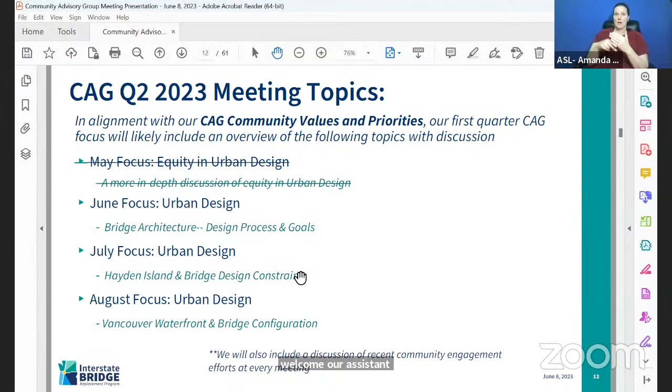Just a reminder, if we can go back to the prior slide, I'll cover that quickly. Just a reminder of upcoming topics again today. We're going to have further discussion relative to design, and the focus of today's conversation is we really want CAG to highlight the process, and how that leads to good design. In July, we'll have more conversation relative to urban design, where we'll focus on Hayden Island as well as bridge design constraints. And then in August, we will talk about Vancouver waterfront and bridge configuration. So with that, I will turn it over to Ray Mabey.

Good afternoon, once again, Ray here. Happy to be here to share with you some program updates. I did want to just note and thank Tom Osborne. He's 8 hours ahead of us, so it's tomorrow for him, I believe. So thanks to him, I really thank him for being available for our meeting today.

The program's been busy and will always be busy, I think. But we've been busy doing a lot of things and engaging with the community in really continuous engagement, but with a purpose now of looking at getting feedback, but also letting them know about the upcoming draft supplemental environmental impact statement that will come out at the end of this year. We want to make sure people are aware of it coming and that they will have the opportunity to comment. Part of that effort has been a couple of neighborhood forums. There was one done in Vancouver at the end of last month, pretty successful, pretty well attended. I think numbers I've heard, don't quote me, we're in the 70 to 90 range.

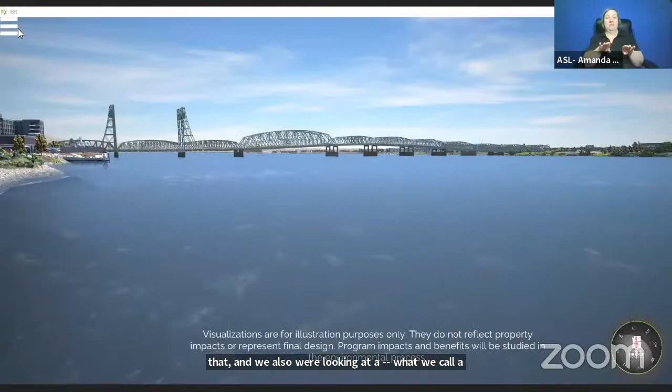We looked at that, and we also were looking at what we call a single level option, where you have both highway and transit and bikes and peds on the same level. The southbound bridge would have bikes, transit and vehicles and southbound traffic, and northbound would have bikes and peds and northbound highway traffic.

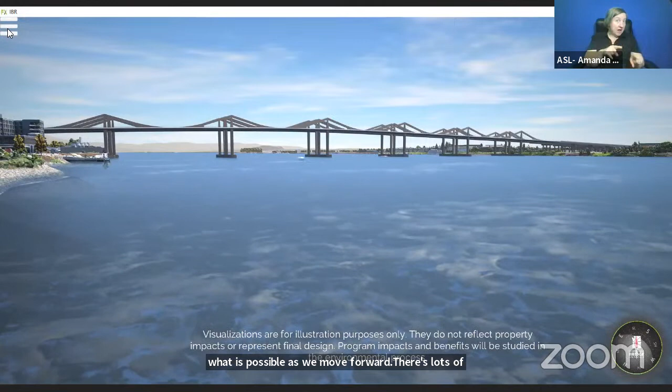These allow for some different options of superstructure type, and we developed these to help share what is possible as we move forward. There's lots of work to go through and validate and confirm that these are indeed feasible and would work, but we wanted to make sure we got some thoughts out there on how we might work through this.

Brent's scrolling through these, but I want to talk about these. The viewpoint we have here, can we just stay on existing and then quit moving it? So this is the existing view from the west side of the bridge from the north bank of the river, the downtown Vancouver waterfront.

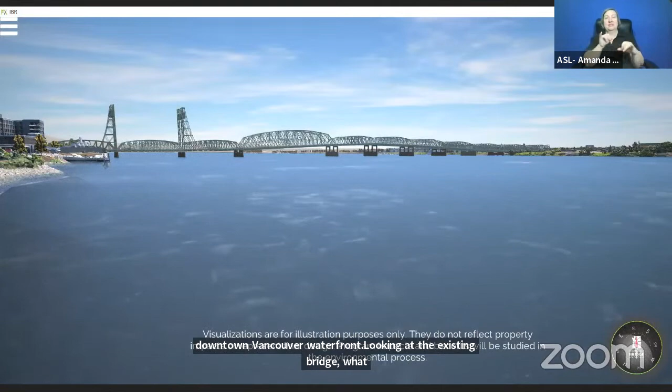Looking at the existing bridge, what we'll do is look at all the options from the same vantage point. Online, we've got 4 different views on our webpage for each of these different configurations, so feel free to take a look at those later. If we can move to the next one in line, please, Brent.

This is a fixed span. We were looking at a movable span, but most of these will be fixed. Using the fixed span or the single fixed span

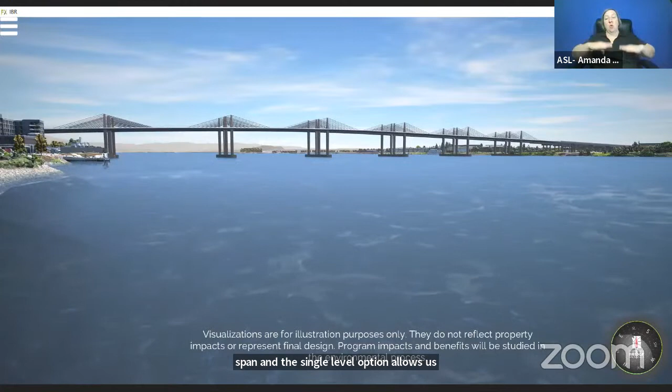and the single level option allows us to lower the deck a bit compared to the upper deck of the stacked option, which allows us to have superstructure that goes above the deck and not impede the airspace needed from the FAA for either Portland International or Pearson Airfield. So it allows us to have a different superstructure that some may view as more aesthetic, but it adds more structural elements.

In this case, this is extradosed, so it's kind of like a cable stayed bridge, like the rail bridge in downtown Portland, the transit bridge there, but it's combined with a pretty robust superstructure. So the towers aren't as high as you might see on a cable stayed structure.

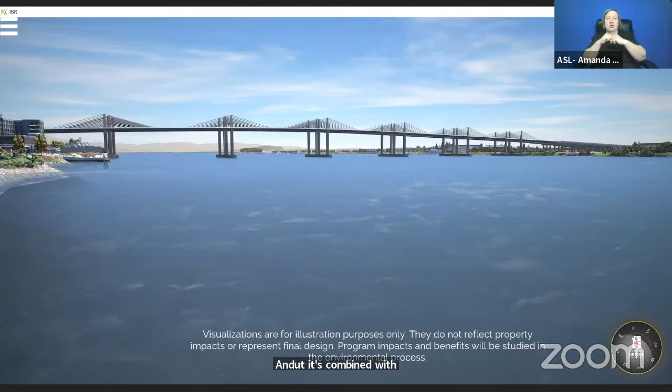Let's go to the next one. One thing to think about too is we've kept the pier locations in the same spot. This is critical to minimize in-water impacts and be able to handle the river navigation channels, either during construction or in the final configuration.

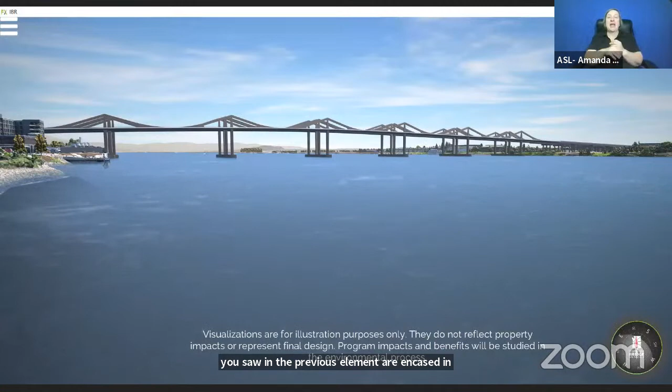In this case, we're looking at a fin-back bridge. The structure is somewhat similar, but the cables you saw in the previous element are encased in these superstructure elements you see coming down from the peak, just adding a different type of feel and texture to this option. Let's look at the next one.

Okay, so this is a haunched concrete beam. This would be very similar to what the I-205 bridge is, the Glenn Jackson, a post-tension concrete superstructure that has kind of a curved beam look to it with a deeper section at the piers. That's a fairly common superstructure type. Next one, please.

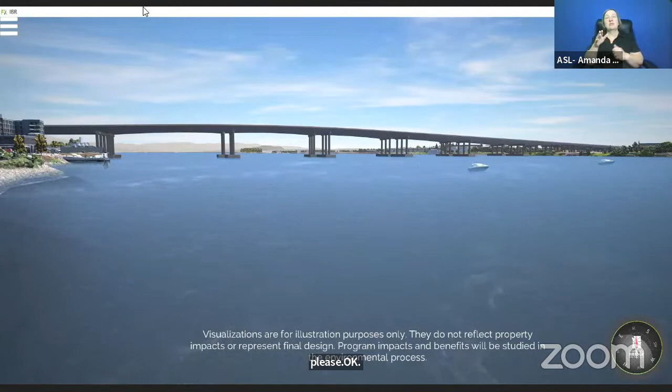Okay, and this is steel girder, similar, not as deeply haunched at the piers, but kind of a similar look. You'll see as we switch between these that the piers look a little different. Now, these are really just to show this kind of relative size.

When we have a steel superstructure for the main portions of the bridge, it's lighter than concrete. So this is to imply that we'd have a little less robust foundation and column areas because of that issue, since the superstructure is lighter. But the design of the foundation and piers is still in front of us. This is just to show a relative comparative size, but pretty similar distance to the concrete we just saw, just lighter in design.

Next option, please. Okay, so this is the stacked version, which is what was developed on CRC. This is much like the Marquam Bridge in Portland that carries I-5 over the Willamette, where you've got a steel truss and a lower deck that carries traffic and an upper deck that carries traffic.

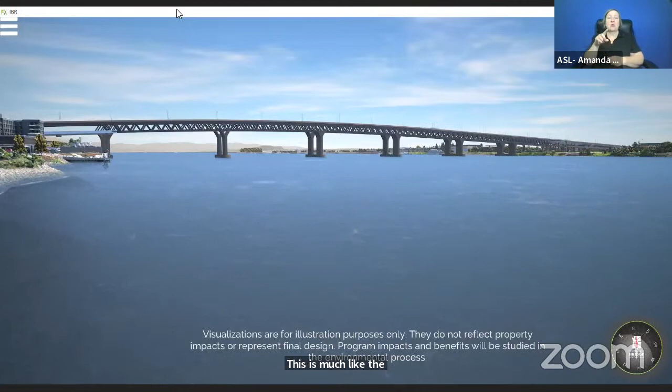But in this case, on the southbound, that lower deck would have the light rail vehicles, and then the northbound would have pedestrians.

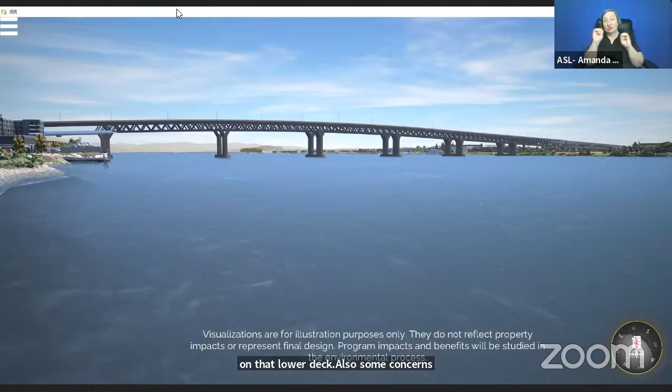The options that I mentioned, single level and then stacked, address different issues. We've heard that there's some concern about pedestrians and bikes being outside the view of the traveling public on that lower deck, also some concerns of transit and emergency response on the separate deck. So moving things to a single level somewhat resolves those issues, allowing for visibility as well as easier access for emergency vehicles.

So each of these has pluses and minuses that we'll continue to evaluate. Next option, please.

Okay, so we've been working with the Coast Guard and our federal partners on what we need to evaluate. We heard pretty clearly that while the previous program developed a bridge that got a permit at 116 feet, the Coast Guard had heard from river users that they need and are looking for a bridge that provides the existing clearance, or unlimited.

So to respond to their concerns, we've added an option for a movable span in our work. This would show that movable span option that would allow for the current bridge height. This is a lift span, much like we have today, but you'll see those towers are just kind of blocks.

And actually there's been advancement in design and aesthetics around movable bridges. The current structures have towers that are open and you can see all the cabling and counterweights. So new movable bridges are putting a sheathing or cover around that so it's contained, and that helps keep the mechanics and the different pieces out of the weather to minimize maintenance issues.

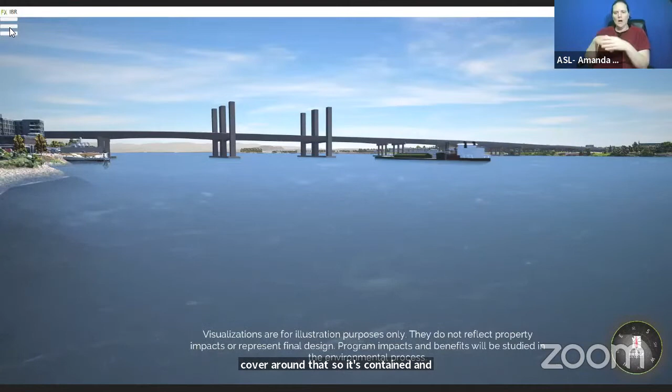The towers that we would see - there's a couple examples that we have from around the world that are much like this, where they just look like a tower and you don't see all the things going on inside them. And the next option, Brent, I think you'll see a viewpoint with that lift span up. There you go. And look, there's a vessel going underneath it now.

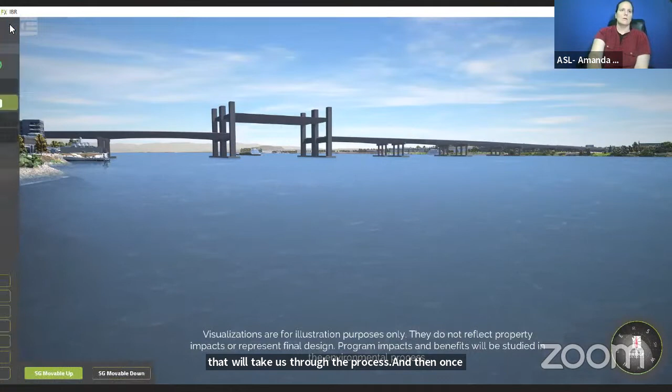So moving forward, really what can we expect and how can we engage in these? Configuration needs to come first. So as we look at the stack versus the single level, that's what we're working through now to understand the benefits and trade-offs around those options, and that'll take us through the EIS process. And then once we land on what that is, then we can start to move to the superstructure type and a process to arrive at what that chosen superstructure type might be.

We just so happen to have Tom and Knight Architects here to kind of guide us through a high-level understanding of what a process might be to do that and the different factors we'll consider. But I'll pause there and see if there's questions. And Brent, you can probably take the visualization down. Thank you for flipping through those for me.

Any questions, comments? Okay, let's see - Zachary, then we'll go to Martha, and then we'll go to Jenna.

Thank you, Ray. Can you talk a little bit about - I mean, we're 2023, so I imagine we can get a sense and a feel for what these different bridge designs would look and feel like from different vantage points. I guess I feel a little handcuffed from just one spot, and then I'm looking online and I think there's four angles, but I'm visualizing like being a sim on the computer game, right? And like walking across the bridge and seeing what that feels like, or being on the beach and seeing what that feels like. When is that going to roll out? I'm assuming that something like that will happen. Can you kind of talk about that?

Yeah, good question, Zach. We actually have both - these first kind of get a first feel. As you know, each of those types of 3D simulations, visualizations, and renderings, we will make sure that we're putting that towards the ones that we are narrowing down to.

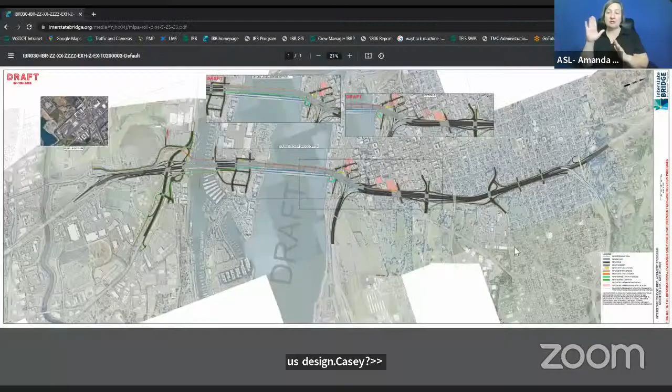Casey? Great, thanks Johnell, and great job Ray. I want to make sure I'm sharing the right screen. I'm going to bring the folks in the group back up to a little bit higher level in the program. Do you see the project area map on the screen? Yes, we are seeing it. Oh, excellent.

Okay, so I want to get the folks on the call and the communities oriented to the recent project area maps that we've shared. We shared this last week at our Vancouver Community Forum and just this week at our Portland Community Forum. So these are new to the program, and they're on our website. We often refer to them as the roll map because it's so long to get 5 miles onto one sheet. This roll map will give you the orientation of the program area, showing you all the investments being studied in the environmental impacts, the supplemental environmental impact statement.

We want to get you familiar with these investments through the entire program corridor. Between now and the publishing of the draft supplemental late this year, and subsequently the 60-day comment period, we want to give you that orientation early, get you familiar with it, allow you to ask questions, get clarifications, and generally be prepared to see those investments studied in the impact statement.

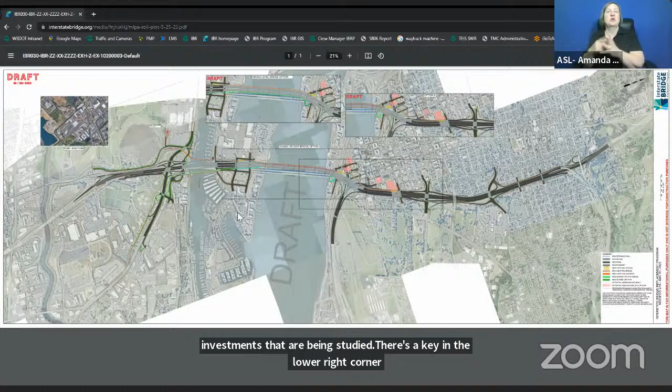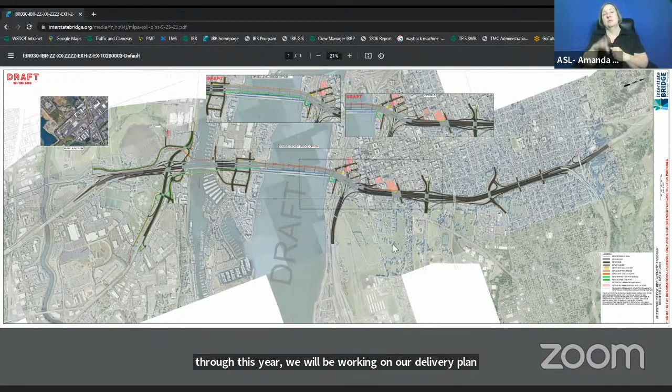Overall, this represents, as Ray mentioned earlier, a very high-level design bringing into the environmental study. We're at less than 10% design, conceptual level design. Through this year, we'll be working on our delivery plan for the program, which will be available to the public early next year.

That delivery plan gives us a sequence of overall design and construction of these 5 miles of investments. That sequence will give folks a picture and timeline to say when we will be working on different elements of the program. A lot of folks ask, like the question here, when will we get to final design? So that delivery plan early next year will help enlighten all of us on the timeline and sequence of all the work. We can't do it all at once, so we need to work on it over multiple years.

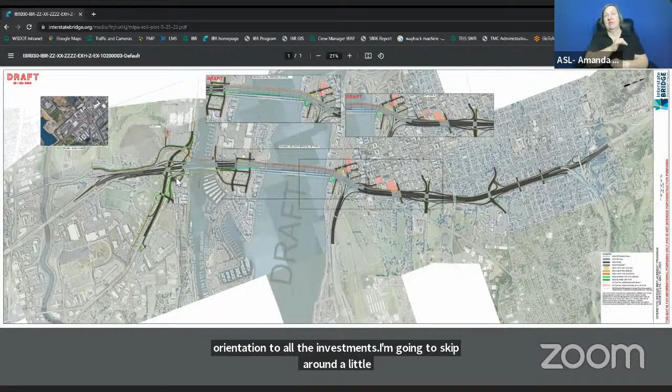So what I'm going to do is walk through the investments pretty quickly. I think I can gain a little bit of time back on your agenda here, Johnell, and walk through the program areas. I want to give more orientation to all the investments, so I'm going to skip around a little bit. I'll start in Oregon at the south end of the program, jump over to Washington, and end near the bridge at both Hayden Island and SR 14, so we can roll right into Knight Architecture's presentation.

Let me just orient real quick. North on this map is to your right, with the river in the middle. That would make west to the top of the screen, east to the bottom, and south to the left.

So we have 7 closely spaced interchanges in the 5 miles. At the south end, we have Victory Boulevard interchange. Just verify if you can see my cursor as I go through—someone yell at me. Yes, excellent. So Marine Drive interchange, moving northward, Hayden Island interchange.

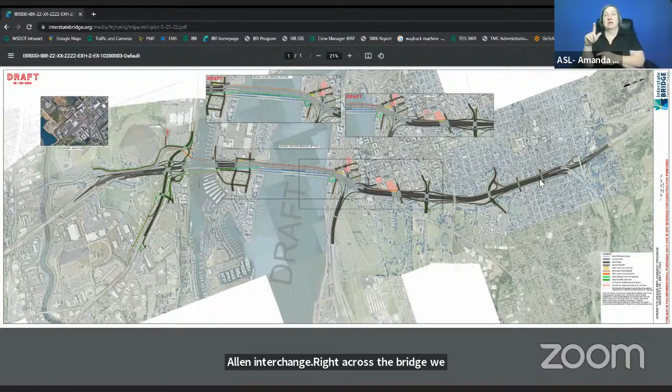On the Washington side, scooting over right across the bridge, we have the State Route 14 interchange, Mill Plain Boulevard interchange, 4th Plain Boulevard interchange, and then we end at State Route 500 and 39th Street interchange. Remember that both the Marine Drive interchange and the Mill Plain Boulevard interchange are primary port access for Portland and Vancouver, and I mentioned the state routes and larger connectivity.

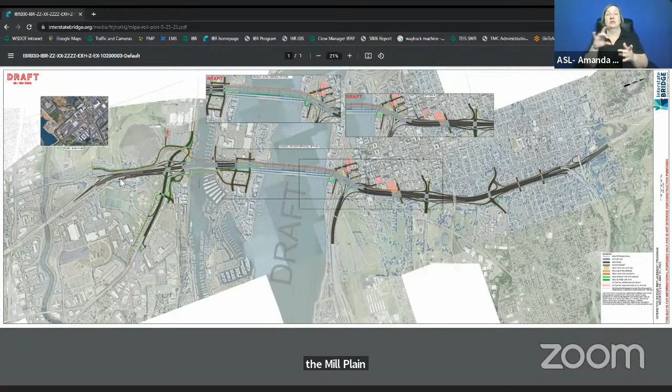So I will try not to make you sick as I zoom in. I'm going to zoom here on the left side of the program and just walk north. The investments reflect all of the investments addressing the purpose and need: the active transportation, the mass transit, the seismic vulnerability with the replacement bridge. As Ray mentioned, all of the elements of the modified locally preferred alternative.

The lime green lines in the program map reflect the shared use path facilities. What's a little harder to see as you look through different areas are the street networks that also have both sidewalks and bicycle facilities adjacent as we develop those street networks.

On the left side of the screen, you see the Marine Drive interchange where light rail transit currently terminates at Expo Station. You can see in the orange line on the west side of the freeway, continuing light rail as the extension heading across Hayden Island, with a station shown between Tomahawk Island Drive and Hayden Island Drive, shown in the yellow boxes.

Active transportation today is not great for wayfinding. In the investments, you can see the connectivity of both the north-south shared use paths, as well as how those connect with east-west existing facilities such as the 40-mile loop trail, as well as other connections within the city of Portland, where we have active transportation connecting to local streets and getting to and from Portland to the south.

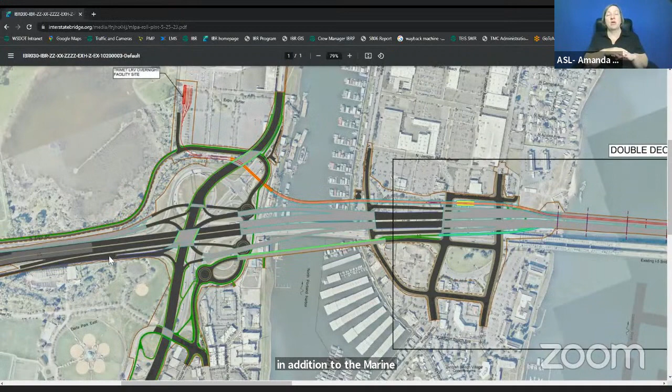The movements for the interchange include all 4 directions for the Marine Drive interchange. In addition to the Marine Drive interchange itself, if you look over here on the left side, if you're coming northbound on I-5 approaching Marine Drive, once you take the exit to Marine Drive, you have an option to stay left and head underneath the interchange up to a local roadway. I'm pointing to that as this circular intersection here.

Then that's your access from I-5 northbound over to Hayden Island. You turn right and then head over to Hayden Island across the arterial bridge shown here. In the reverse direction, to go south from Hayden Island, you go across the arterial bridge, back underneath the freeway to the other intersection, and then enter the same on-ramp as the Marine Drive.

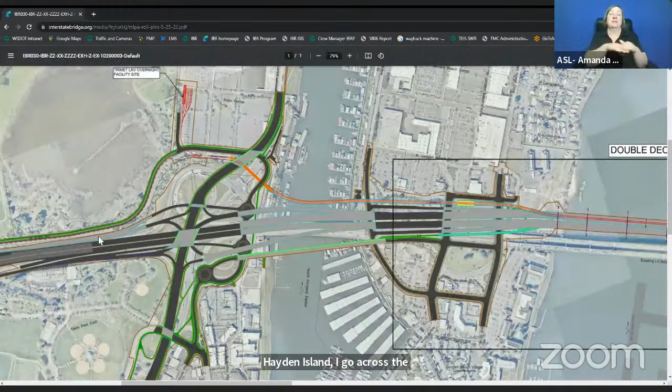To the left side of the Marine Drive interchange, in concert with the Victory Boulevard interchange, we have a braided ramp getting on from Marine Drive to go southbound on I-5. That braids over the top of the existing southbound exit to Victory Boulevard and Denver Avenue. The braided ramp is one tool, just like auxiliary lanes or collector distributor lanes. Those are tools we have to address very closely spaced interchanges.

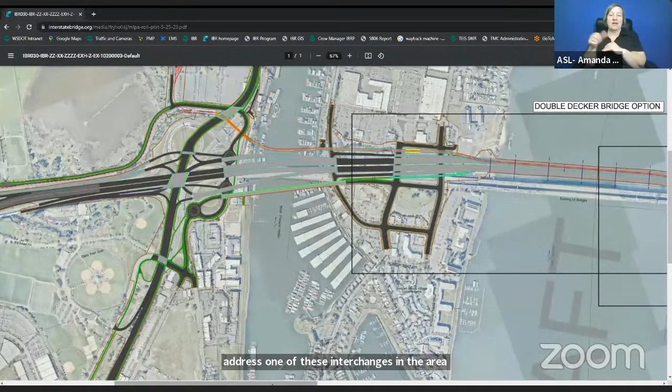Again, when you address one of these interchanges in the program area, you have effects on others. So I'm going to skip around on you just a little bit and head to the north so I can end at the south, or at the bridge head. We're going to go all the way into Washington and then come back. And I have to zoom out.

Skipping over to Washington, the SR 500 Fourth Plain work is being done in that area. I mentioned the braided ramp - this has a braided ramp addition for southbound I-5, braiding with the SR 500 westbound to southbound movement, a very large movement today that WSDOT in the last few years started addressing with ramp meters. That braids that movement. Just as a side note, the resultant of that, if you're headed westbound on 500, you no longer can get off and go straight to the Fourth Plain Boulevard interchange. You'd have to take a different route, such as 39th Street or Mill Plain.

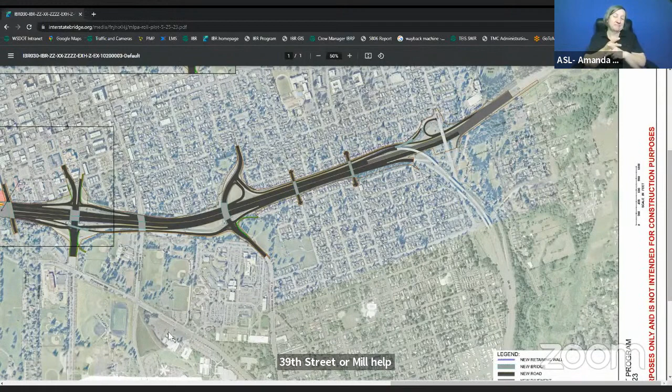The Fourth Plain Boulevard interchange doesn't get much improvement or different form for the interchange itself, but it adjusts based on the needs for the freeway there, as well as the braided ramp connections to the Mill Plain Boulevard interchange.

Moving south just a little bit, this also reflects the replacement of the 29th and 33rd Street overcrossing. Each time we work through the investments in the program, we want to look closely at the east-west connectivity of active transportation, as well as north-south connectivity.

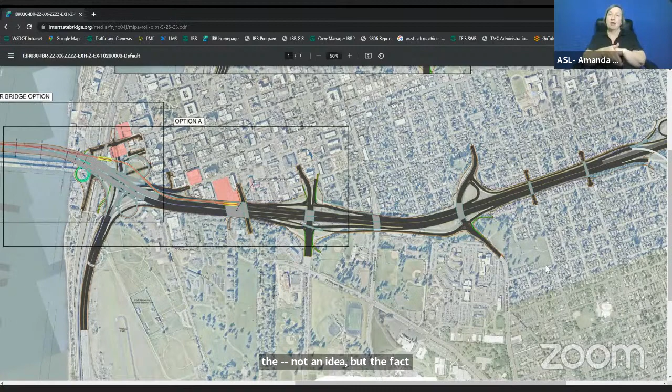So we're showing that though these bridges are replaced, if the facilities there aren't conducive to walking, biking, rolling, we want to make sure those are great facilities for the options getting across the freeway. We want to reverse the fact that the freeway is a barrier to crossing and connecting those neighborhoods. So each one of these, we want to make sure it's the best it can be.

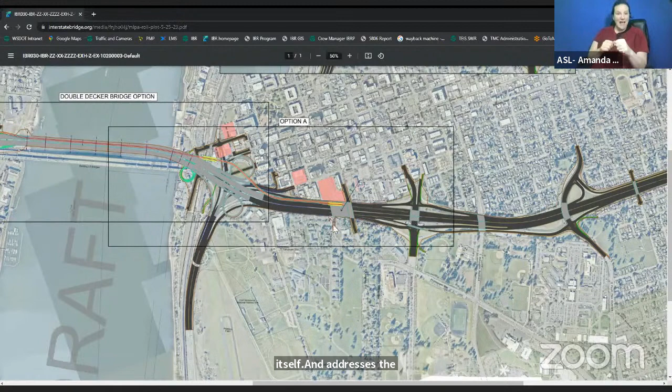Move south back towards the Mill Plain Boulevard interchange. Again, this is more efficient than the interchange today. It addresses the work on the mainline I-5, addresses some clearance issues with the interchange itself, and addresses active transportation through the area as well. To the south of the interchange, there is a collector distributor system between State Route 14 and Mill Plain Boulevard interchange in both directions.

I'm going fairly quickly, but I aim to save a little bit of time back. So I'm going to get close to the bridge here and get ready to answer any other questions, and turn it over to Knight Architecture.

So with the modified LPA, I mentioned light rail transit with 3 new stations. As mentioned, in this option shown here, the double deck option shown under the southbound bridge, coming out to the Vancouver waterfront with a station at the waterfront, shown where my cursor is. Light rail hugging the I-5 alignment and ending at Evergreen Boulevard vicinity here at Library Square.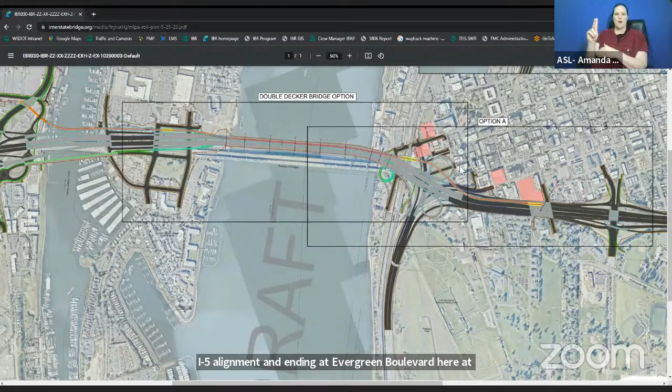The program is studying up to 0 to 3 park and rides in Vancouver, up to 1 at the waterfront and up to 1 at Evergreen, again from 0, 1, or 2. Park and rides are shown in these lighter reddish pink colored squares for options. The third one is a little bit hard to see, but it's about where my cursor is, underneath the new bridges.

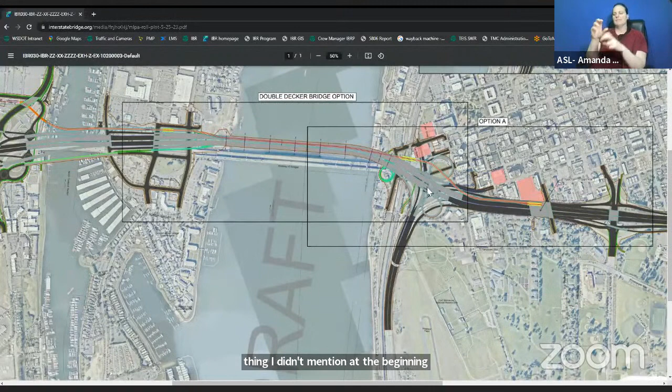The full interchange at State Route 14 is an elevated interchange. The one thing I didn't mention at the beginning that I needed to is this is reflecting permanent investments. Some of the temporary works that are needed to do this work and keep traffic moving are not reflected in these maps.

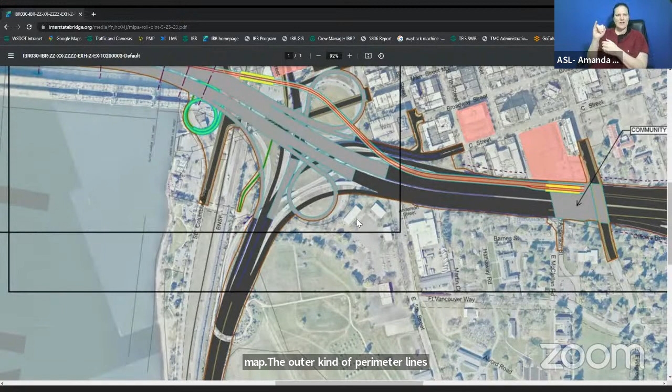And the other part is that in some areas of the map, as you zoom in, you'll see various lines in the map. The outer kind of perimeter lines may not look to follow what the investments look like. Those are what we would designate as the limit of permanent investments in the program area and what's being studied for those permanent investments in NEPA.

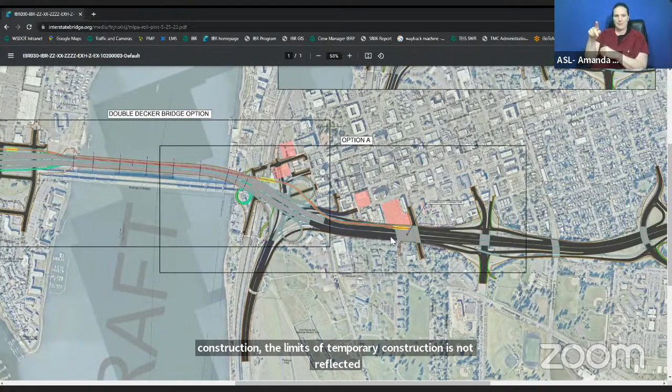There's also a dashed line that represents permanent underground investments, such as tieback of walls. Again, these are high level design, with more work to do to figure out what is needed for those design works. And just to recap, the limits of temporary construction are not reflected in these maps, but it will be published in the draft supplemental environmental impact statement this fall.

And I want to end up with the bridge and Hayden Island a little bit more. I'll start with Hayden Island. I described the 2 ramps for the south side of Hayden, access from the south to Hayden Island. The 2 ramps from the north exit, southbound ends up at Jantzen Drive, and northbound from Jantzen Drive to northbound I-5. The addition of Tomahawk Island Drive underneath the freeway, so you have 3 east-west street connections under the freeway, as well as the bicycle and sidewalk facilities for those.

One thing I didn't mention in Vancouver was the new connection of Main Street under all of the SR 14 facilities down to the Vancouver waterfront.

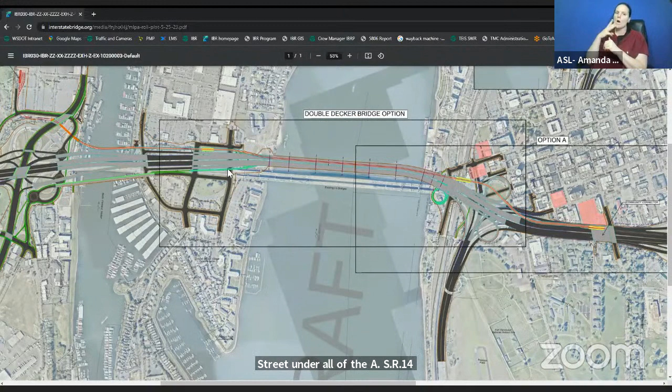The lighter gray in the map represents, for instance, the interstate when it's on a bridge structure. The dark black, almost dark colors represent the roadway when it's sitting on the ground, and it may be ground that's still at a higher level than the surrounding areas. For instance, on the south side of Hayden Island, you see this darker area for I-5 in both directions. It's shown that that's not a bridge structure, but it is elevated above, for instance, the local areas adjacent and off the sides of the improvements as shown there.

I think I've covered most. The one last part I would say is that these roll maps, and we'll zoom back out a little bit, reflect and show that there are options being studied within NEPA.

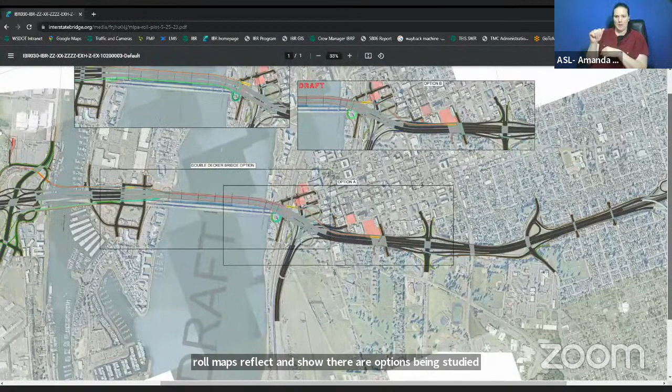The options shown on this roll map include the double deck option, and then you see an inset graphic that shows what the single level bridge option looks like. Most of the differences really occur between each shoreline or just onto the shoreline, and from there the program difference is none from that point.

On the right side, you see option A listed and option B. Those are a shift of the alignment in Vancouver, kind of more easterly alignment on the main graphic, and then the inset is more of a westerly alignment, looking at a range of possibility for that alignment through Vancouver.

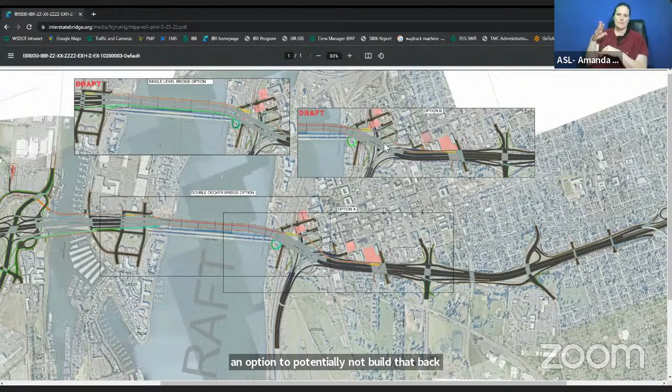Also in option B, you will see other additional options. The northbound off-ramp to C Street, that's the loop ramp on the east side where my finger is pointing, and that's an option to potentially not build that back, as well as the southbound on-ramp from C Street to I-5. So those are independent options shown all within that collective graphic.

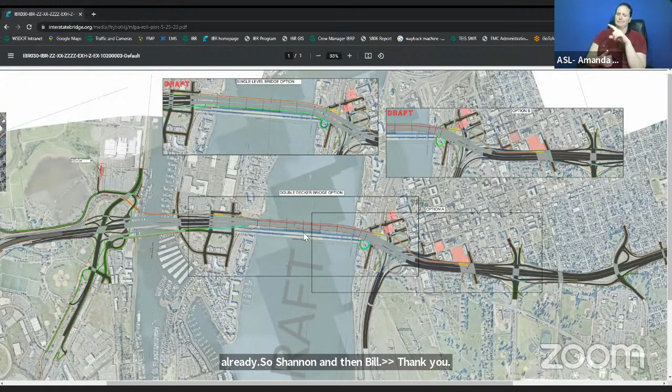Thank you. One of the things that I've been questioning in all of this discussion is if there's been some consideration to all of the oversized loads that move from the ports of Vancouver and Longview across the bridge and into routes in Oregon. I'm just wondering if this will restrict any of that kind of movement.

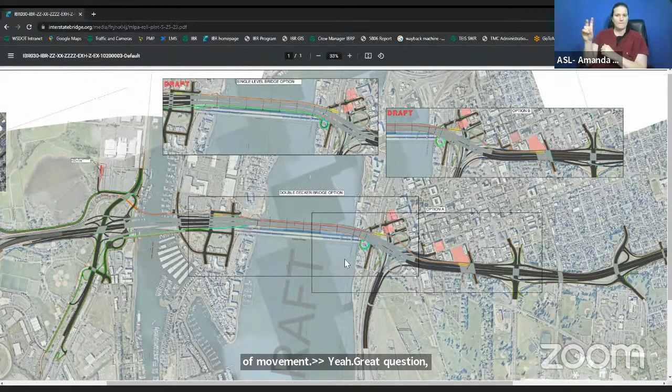Great question, Jana. We've been working with the Port of Vancouver on the existing and any proposed super load type, both height, width, and length. One of the constraints running into this program, or in the CRC, we know was just loads getting to I-5, for instance. So yes, we are looking at all aspects of that, from travel through the corridor, especially from those known elements through the program area.

As we design these, we don't have a hard design requirement, but we are considering how we can make that work without significant change. So far, at this early stage, we will get more into that with final design, but we believe that we can get those loads through based on what we've received from the port and known from up north.

Well, thank you. I appreciate that. I work with a group called the High, Wide, and Heavy Coalition, and it's got the ports as part of it. So if we can offer any assistance there, we're happy to. Thank you.

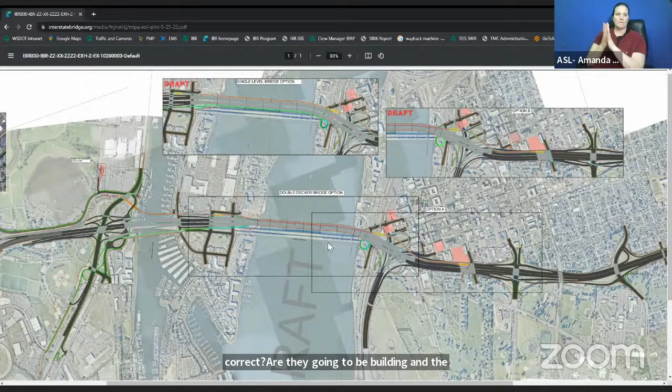Yeah, I think I follow what you're saying, Bill, and I'll start from the bridge out. Let me say it another way: how do we build this and keep traffic going? Because we can't just shut down the freeway, right? Thank you, that's what I was looking for.

Exactly. So the offset of the bridge itself is one of the key parts of that. Of course, we have multiple years of constructing the main river crossing and bridge anticipated. As we're building that, we need to work closely with what will be our design builder to plan to keep traffic moving in both directions. Our goal, our commitment actually, is to keep 3 through lanes of traffic in each direction moving through the program duration.

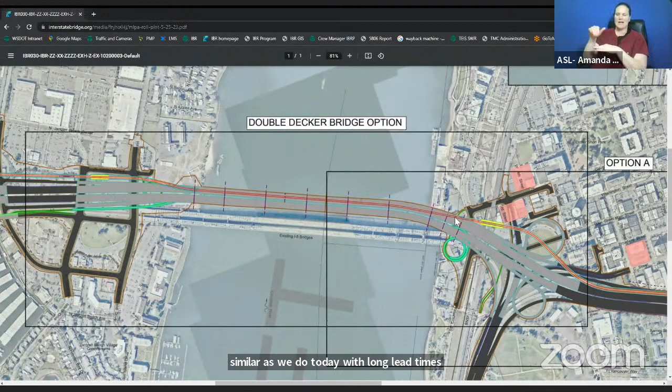There will be times when we impact that traffic. We try to do that similar to how we do today, with long lead times for the public. There may be weekend closure of lanes or nighttime closure of lanes, shoulders. There will be some ramps that might be impacted for longer durations as we try to replace some structures and bridges within the program area. Those will be advertised in advance with known detours. It is a challenge, trying to build a whole new set of infrastructure in the same place as it was.

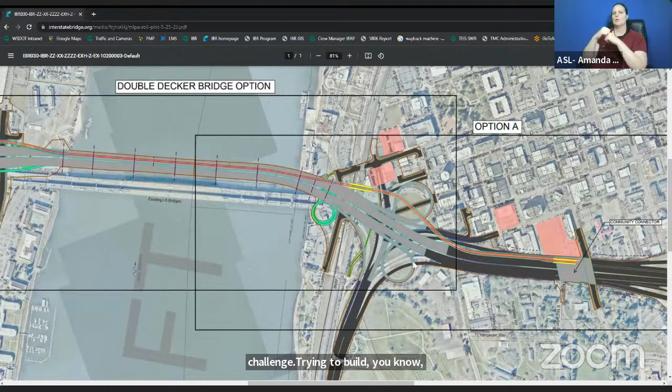As you reach both sides of the land, that's where it really becomes prevalent, trying to shift without adding a whole bunch of different impacts. We've often referred to this as threading the needle, because we have to shift the traffic in different directions, shift them to the west, shift them to the east. Meanwhile, we have some tie-ins to make.

There'll be some minor closures when we work on those tie-ins at both ends of the bridges, and as we sequence the rest of the program. I'd say it's more like you're going to be changing the wings on the airplane in the middle of the flight. Heard that one too. I like that one. I don't like doing it, but actually I like doing it.

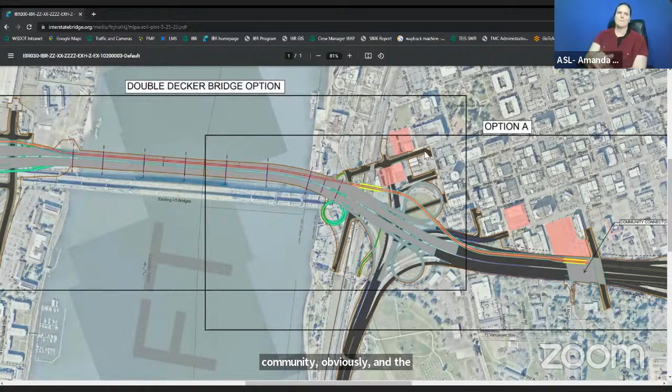It's a good challenge, but it's really important to the communities, the economy and well-being of the communities. So I understand that. Zachary? Thank you. It's really striking, the image, to see it all. I appreciate you laying that out for us.

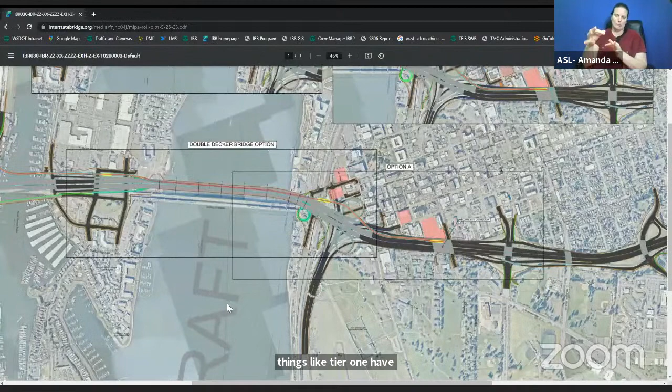One of the things, putting on the lens of a pedestrian advocacy organization, we're often told there's not enough money for that improvement, there's always a resource question. I'm curious, when you look at this project, what are the have-tos? We know we have to have a new bridge, that's a have to. There's certain connections that have to happen. So I'm curious, as you look at this map, are there tier 1 have-tos, tier 2 really-want-tos, tier 3s, things we could stagger so that if we go over budget, we can pull back on some of those pieces, so that we aren't robbing from other projects in Washington and Oregon?

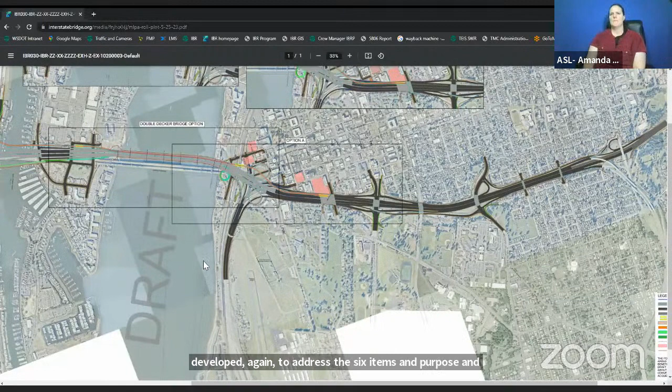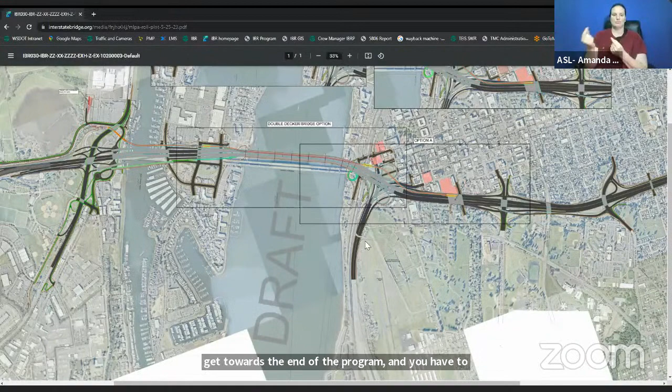Great question. To start, the program is developed to address the 6 items, the purpose and needs. Each of the investments made here is intended to do that, and they work in concert with each other. This is a major multimodal corridor program intended to provide all the benefits through all of the investments made. The difficulty in saying that some of those are lesser in priority is that in the past, you get towards the end of the program and have to cut corners. What are the things you have to cut? In the past, it's been, well, we have to cut some landscaping, we have to cut some active transportation.

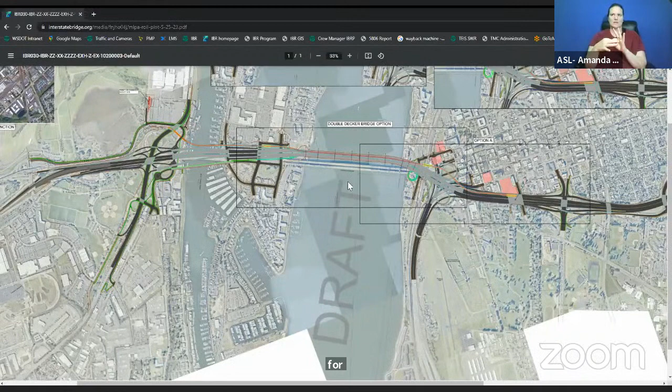That's not our goal. We aim to center climate and equity up front. We want to make sure that active transportation is there to provide options for those users that need those facilities. Same thing with transit connectivity, not only the shared use paths, but all the connectivity to the existing system, the local street system, the transit centers envisioned around each of these stations. It's very difficult at this point to have a prioritization that says these aren't needed. All of the investments here address the 6 purpose and need statements.

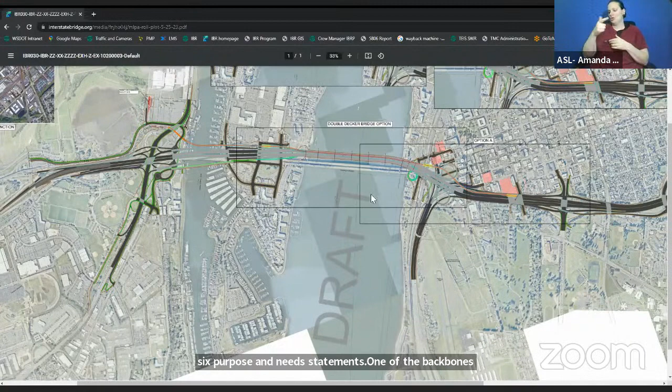One of the backbones of that is we have very closely spaced interchanges, a lack of mass transit connectivity across the river, as well as active transportation, and we have seismic vulnerability today. Each one of these has its purpose inside of it. We're not approaching it with the mindset of cutting priorities. We're approaching it with the mindset of needing to address those 6 purpose and need statements while centering equity and climate, and trying to find solutions that have partner and community support.

Our aim is also to stay within program budget, and that's a continually estimating and updating process. So that's just not the way we approach it.

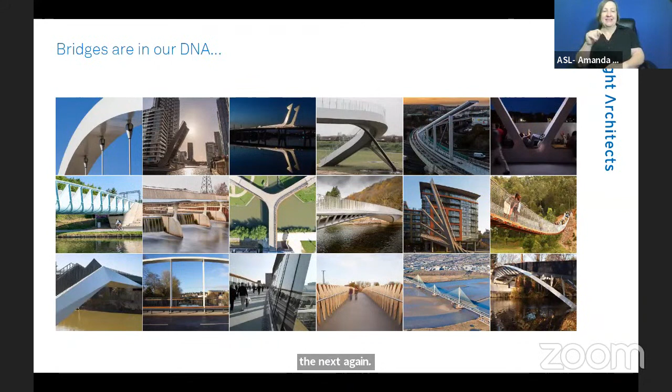So we're Knight Architects. We specialize exclusively in bridge design - we're pretty useless at anything with a door, but bridges are all we do. We've been doing them for 17 years. What I wanted to show on this slide is that there's quite a variety to our portfolio, because we don't have a company style. What we try to do with all our projects is understand what the right solution is for the specific location and specific communities of those schemes. We work all around the world, and we really want to be designing your bridge, not our bridge.

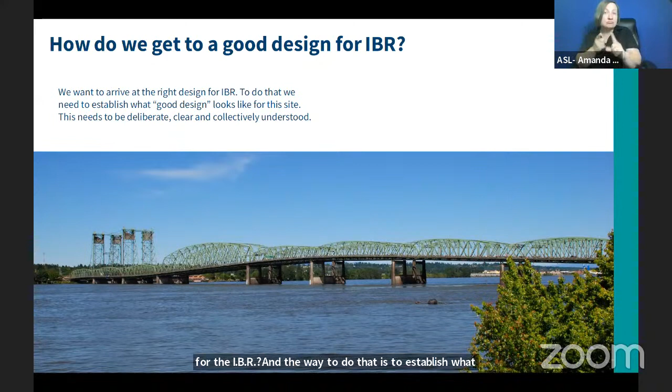So how do we get to good design for the IBR? That's the right question, and the way to do that is to establish what good design looks like - what are we aiming to achieve here. Design is a very subjective subject, and what we don't want to do is just give you the typologies you've seen earlier and ask which of these you like, because that leads to differing opinions. Design does start with looking at different options, as we're doing now with these typologies, but it does not end there.

Design is an iterative process - it's about creating something, building something, and refining it. So whilst we might start with these high-level typologies, that is certainly not the end of design, it's only the start. We don't want to give you the impression that the lovely renders you're seeing are completed design, because people sometimes see a material and a boat driving under it and think that's it - but it's not. These are really just sketches of typologies, and the design work is ahead of us.

If we give you a bunch of typologies to assess against a selection of criteria and leave it at that, what we've found in the past is that tends to lead to the least worst design rather than the best design. It can lead to a not very well-rounded design, something that doesn't fit as well as a design could. So what we want to do is build consensus, build a narrative around the design, so that when we get to the final product and they're cutting the ribbon on the bridge, everybody knows why it looks that way and understands the narrative that supports it.

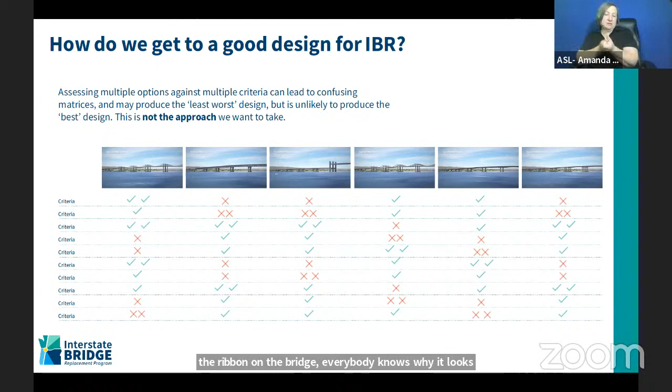Sometimes we get asked what bridge architecture is, and it can be misunderstood as decorative, or adding something to the engineering - that's certainly not what it is. Bridge architecture is an integrated discipline with that of the engineer. It's about refining, polishing, and really putting people at the heart of design.

So we like to say that we don't yet know what the design for the Interstate Bridge Replacement Program will look like, but we do know how to get there. We think a really important part of that process is asking the right questions. Often when you ask people what the bridge should be, they ask closed questions first, like how will it be built and what does it look like? But we think it's really essential to first ask open questions about why it's needed and who it's for, which will develop a brief that you can respond to with what it looks like and how it will be built. That will come, but it has to come after the more people-centric questions. First think of people, then think of the object.

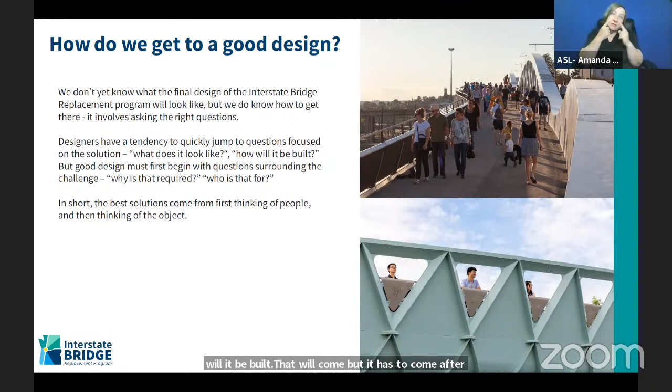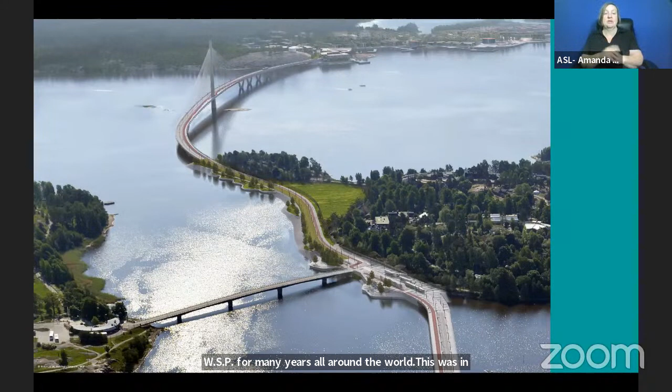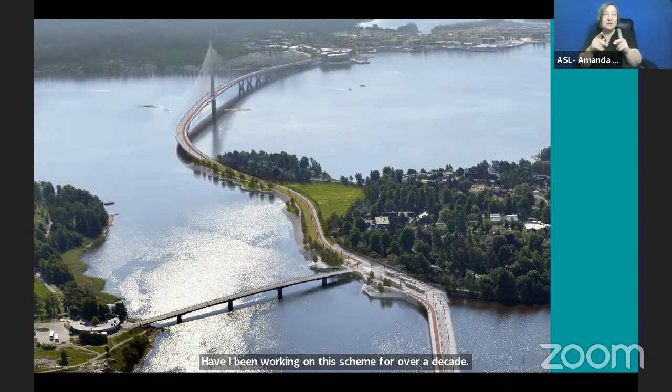Next slide, please. I put in this slide because the engineers on the scheme are WSP, and we've worked with WSP for many years all around the world. This is from Helsinki last week, a big project spanning 1.2 kilometers across the bay, mostly for pedestrians and cyclists. It wasn't the geometry I wanted to mention, but really the time it takes to get there. We won this competition in 2012, so I've been working on this scheme for over a decade. Throughout that time, in the initial stages we worked out lots of different typologies, brainstormed ideas, but most of the time was about refining the design toward the finished product, improving things and polishing it so it becomes a really lasting feature of the city.

Next slide. I can skip over this, it's really just a poster to say: put the why and the who questions before the what and the how questions.

So we've spoken a little bit about alignment design, the route that the road surface takes across the water and the land. We then have to hold that road up with structure, and then that structure interacts with the urban landscape around it. Next slide.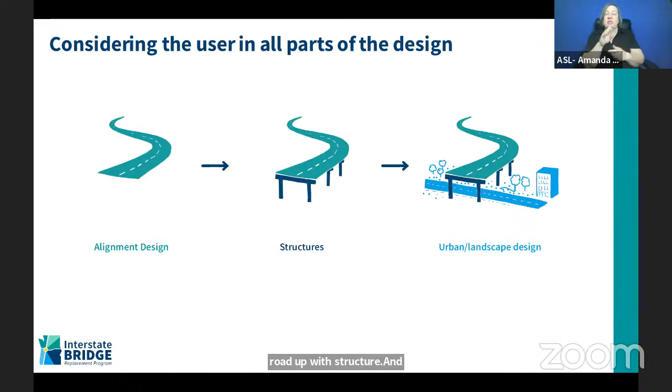So bridge architecture, I think, sits at the nexus of that. If you could just go back one - bridge architecture sits really at the nexus of the road alignment and the urban realm. We have to work at all scales, from the typologies you were seeing earlier, like cable stay, truss, or beam, right the way down to details like the handrail, the signage, the soffit, the piers, and how it interacts with the world around it. The architecture of the bridge and the urban design exercise are two sides of the same coin. The better we can make the bridge structure, the better the spaces around it are going to be - more inviting to be next to the bridge, to live next to it, to be underneath it, and the safer it will make you feel as part of your journey.

So I'll hand over to Laura at this point, who's going to talk you through a few of those journeys and how this bridge might affect people.

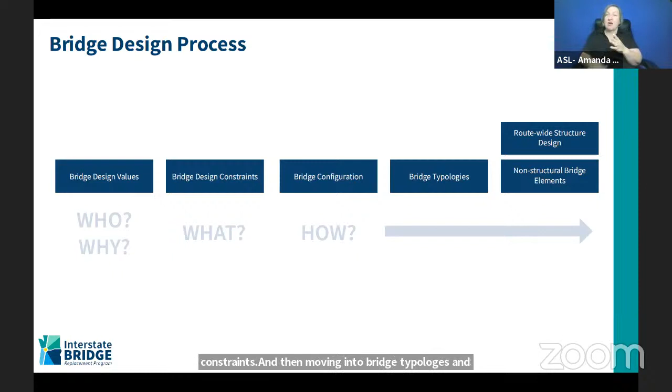Thanks, Tom. Just to recap where we're going with this process: today we're talking about the bridge design values or goals, so who and why, and we're really interested in getting your feedback on both the process and some goals you'd be interested in including. We're looking at bridge design constraints, setting that up for the discussion in July - what the bridge needs to achieve in terms of physical constraints, threading the needle, so to say. Then bridge configuration, discussing that in more detail toward August - how we'll start carrying out different bridge options that meet both the goals we set up and the constraints. Then moving into bridge typologies and route-wide structural design and non-structural elements that can apply to any option we pick. Next slide.

So when trying to answer the big why question for the bridge, we started with the project purpose and need. They tell us a lot about the big picture, but don't tell us specifically what the bridge should look like. So we need to develop these further to guide our design of the bridge. Next step.

So we've been working with the urban design team to develop some urban design principles and goals, which would feed into the different urban design disciplines, looking toward getting to a holistic urban design for the project. Next slide.

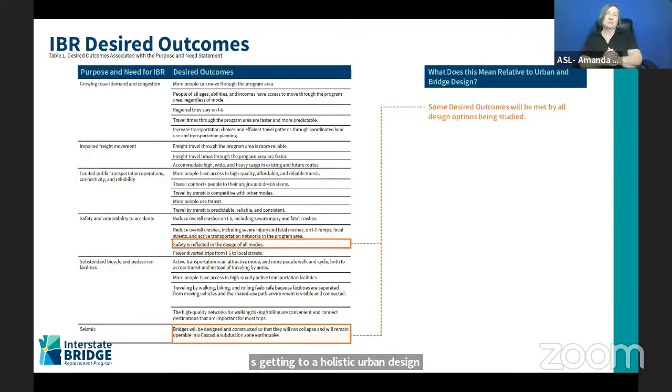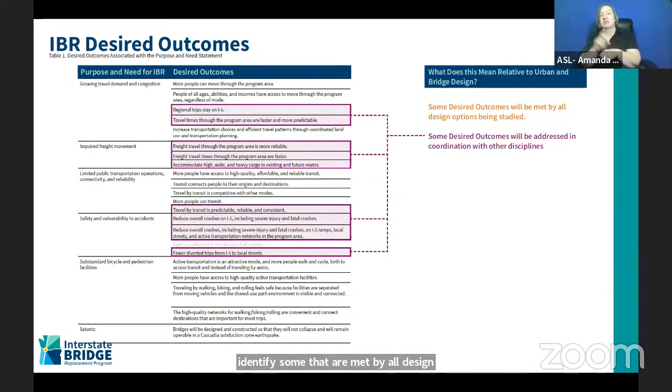We've been starting with the project desired outcomes, identifying different goals that we see as key to our work, differentiators in what we are doing. They're all important, but some are much more specific. So we're starting to identify some that are met by all design options, some addressed in coordination with other disciplines, and a few directly linked to the design of the bridges and the urban realm.

Somebody was going to jump in - I think Lisa does. Lisa: This is similar to the comment I made a couple minutes ago. This is work that this community advisory group has already done, putting in place the values and priorities. Laura is threading it with the desired outcomes, which is threaded with the purpose and need. So this is just another reminder of the good work this group has already done. As we continue to look at urban design principles, I think it's important we remind ourselves of the values and priorities this group has already identified. Thanks, Lisa.

So we're trying to pull all of these goals and desired outcomes and aims together to form something that would really be a good basis to start building the design off of. Next slide.

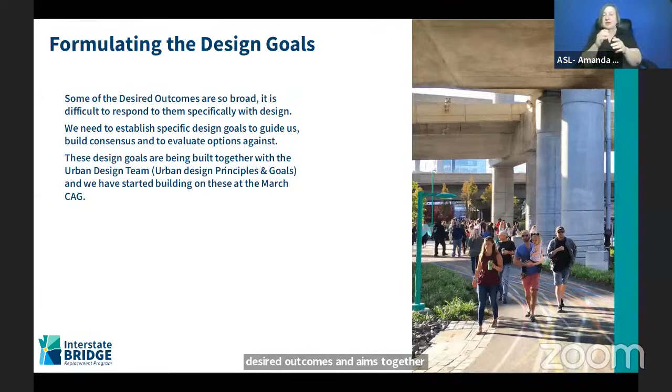So this is a very large program with some very big goals. One challenge is that we want to spend some time considering the scale differential of this project. On a very small project, like a small footbridge, consideration of the user is important, but if you didn't consider the user, the impact would just be that you don't have a very nice footbridge. On a scheme like this, which is about 5 miles, if we're not considering the human scale and user impact, it has a very big potential to negatively impact communities and the people around it.

This is something we want to avoid. The federal government currently has a pilot program called Reconnecting Communities to reverse harm across infrastructure in the United States, where connection between communities has been severed. This is not where we want to go with this project. We want to set it up right from the beginning so it is good and positive for the communities it goes through, with good east-west connection, really thinking about how it impacts the people living around it, using it, and their daily lives. Next slide.

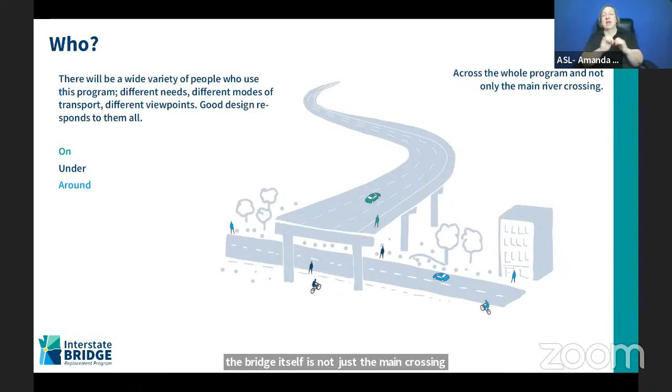So who is using it? This is what we really want to start with. We've got a wide variety of people interacting with the structures - people passing under it, passing on top of it, east-west connections as well as north-south. People who might never use the bridge, but it's part of their daily lives around it, on it, and under it. It's also worth noting that the bridge itself is not just the main crossing, but it impacts how the bridge comes down to ground, both on Hayden Island and Vancouver. Next slide.

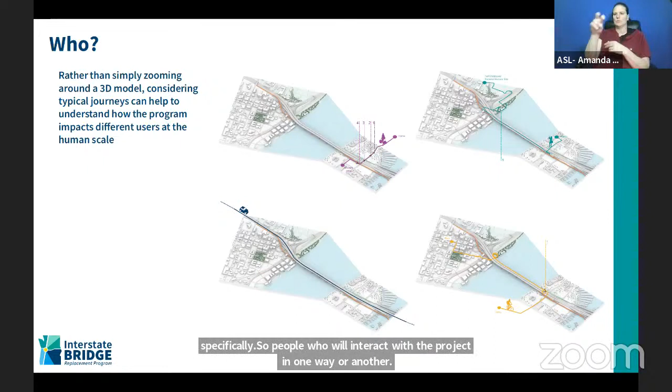So rather than simply zooming around a 3D model of the bridge, we wanted to start considering some typical users specifically - people who interact with the project in one way or another. We can use these indicative journeys as a tool to discuss the design and develop key considerations and goals. We could have started with a vehicle user, but their experience of comfort will be largely driven by highway and safety design codes, and for the most part they're in their car in a controlled environment with flowing traffic. So we wanted to start by exploring a user who may be more vulnerable or sensitive to the design and structures.

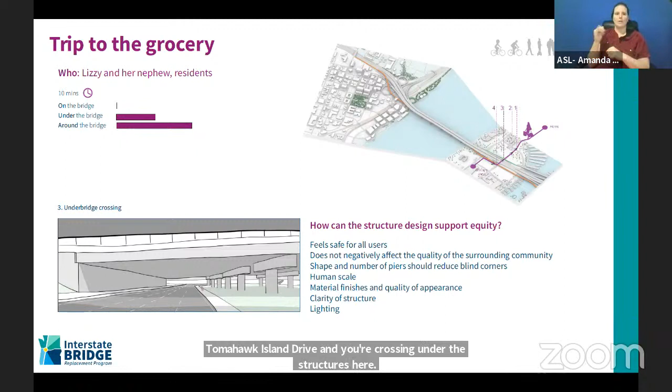So for instance, imagine you're coming along Tomahawk Island Drive and you're crossing under the structures here. What could that feel like? Does it feel safe? How could the design of the structure support an equitable solution? Some things we often think about in this situation is how would that feel safe for all users at all times of day, and something people feel comfortable using, comfortable traveling underneath.

You can hardly see them in that picture there, but there are little purple people, and they're very small in comparison to these bridges. The scale differential is huge. So we need to address these spaces very carefully and make sure that they are comfortable and inviting and beneficial to the communities that they serve. Next slide.

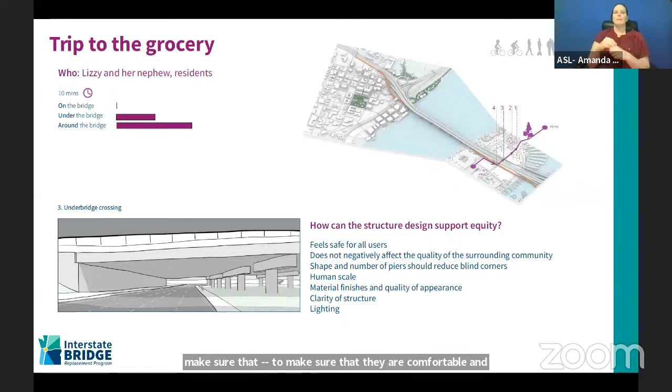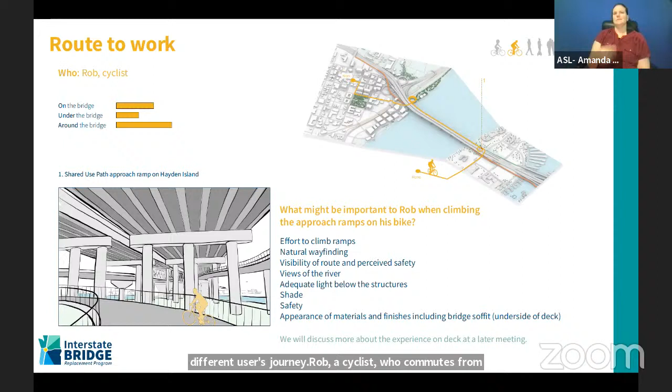So this one is looking at a different user's journey, Rob, the cyclist who commutes from Hayden Island to Vancouver. We will discuss more as we go through these meetings the experience on deck. And the image here is a sketch of what could potentially be a space where Rob is coming up the shared use path ramp up towards the bridge.

We don't want you to focus too much on the specifics of the design in these images, but use them as a prompt to start to think about what it would feel like to be in these spaces, and to think about what could be some goals and priorities for improving the user experience on and around these bridges. Next slide.

So a couple of examples here where we've looked at shared use paths where they are separated from the highway. On the left, we've got a timber barrier that helps to temper the effects of noise, and the path is actually dropped a bit. So as a user on the shared use path, you're quite protected, you've got nice views out to the landscape, and the experience of the highway isn't as direct and immediate. Next slide.

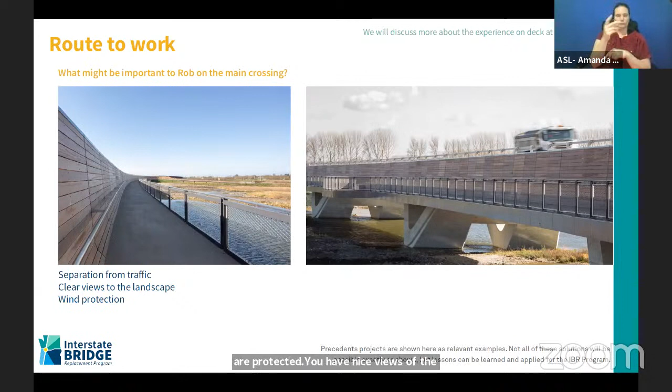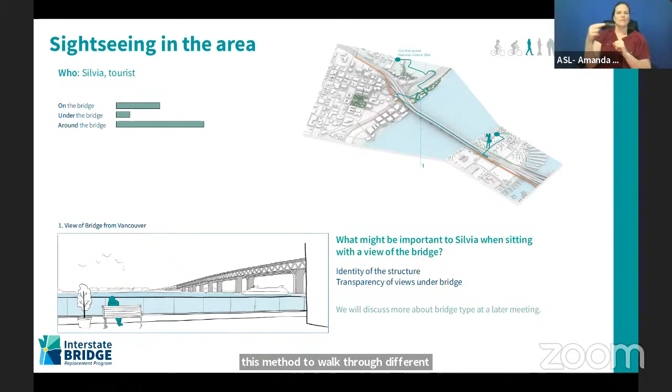So what we'd like to do is use this method to walk through different routes, different viewpoints, and to really explore as we go through these meetings what aims and goals we will have for the people who live and work and use these structures.

We can move to the questions now. Would you like me to introduce this? So I guess the first question is we would like to know whether you agree with this people-first approach to design, if this method resonates with you and seems like a good way to approach and discuss and move forward with this.

And I see lots of hands. And then secondly, what would be important to you as an individual, thinking about goals at these different spaces? I think there will be lots of opportunities to talk about this over the coming months, so if you don't think of it today, please give us feedback as we go forward. So we might need to put those slides back up again. It's 5:51.